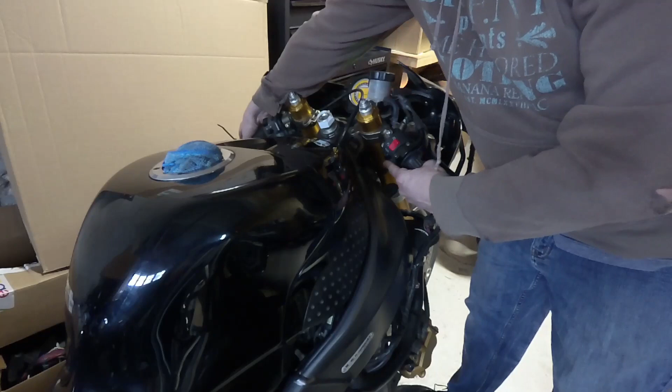We are now in 2023. I haven't made a video for a couple weeks because I was actually 3 or 4 provinces away. I was in Nova Scotia for Christmas. I haven't been home since about the 23rd of December, and I got back around the 7th of January. So kind of missed working on the bikes. I didn't really have much to do down there, just visiting family. I hope you all had a good Christmas. I hope you all had a good New Year's.

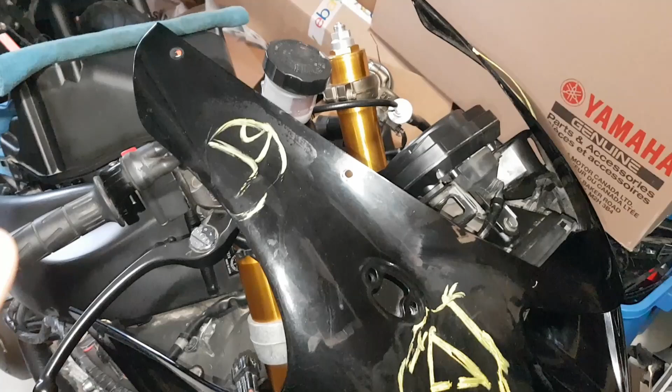We're back in 2023. We're ready to get back on the ZX-636. Alright guys, let's get right to it. We're going to try to start this bike up in this episode. In episode 2, I hit the bike with juice, and it looks like the bike is alive. So the next step now, let's get this thing started. We're going to continue working on this auction find 2006 Kawasaki Ninja ZX-636.

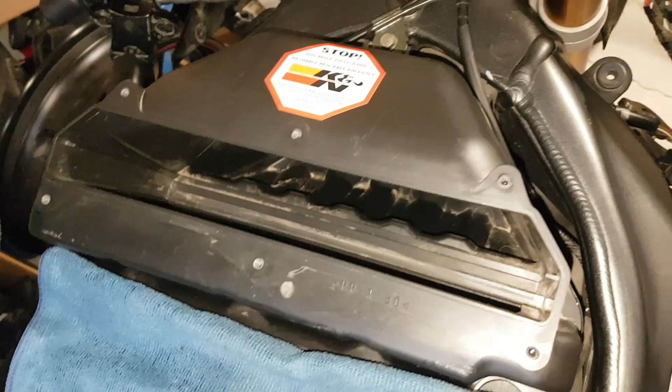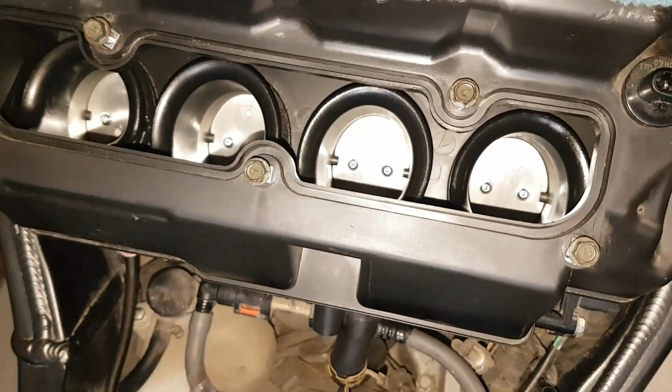I've got the airbox back in place. I've got it all bolted down. Everything looks good and tight under here. It's all secured. What I'm going to do now is I'm going to drop in the K&N air filter. I've had it soaking overnight, so I've cleaned that up a little bit. I've cleaned the airbox out as much as I can. So we're going to get that air filter in. We're going to throw our injectors back on here on the bike. And then we are going to get the tank reinstalled. And we're going to try to start this bike up, guys.

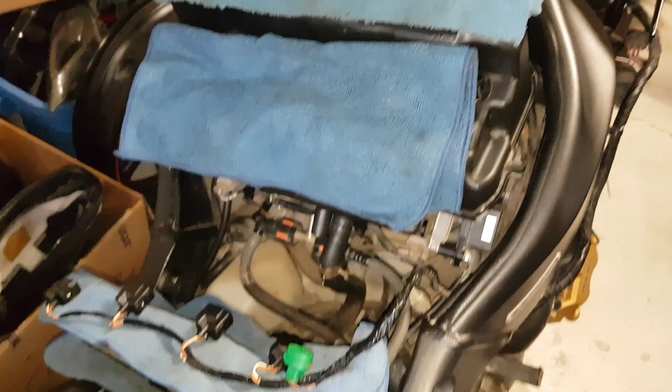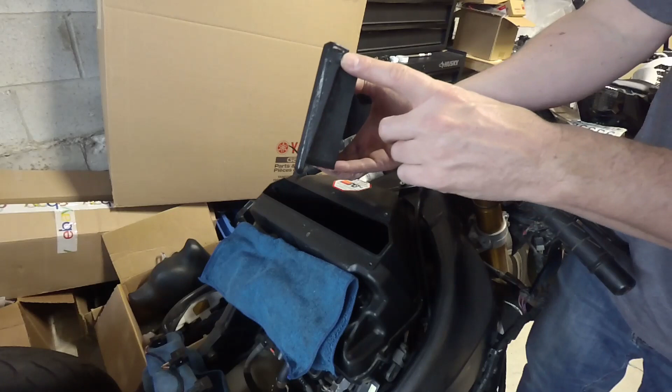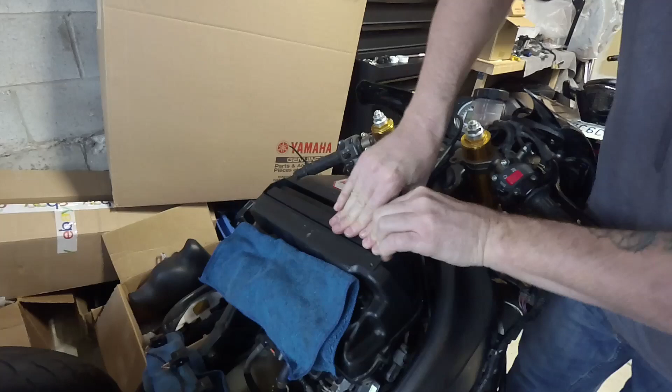So here is our K&N air filter, guys. If you want to know what the part number is, it is KA6005. It's got like an angled edge on it. This can really only go installed one way inside your airbox. You can't really go wrong. I've had this soaking overnight. I've cleaned it all up, so it's just like new again. Okay, let's push that down. Okay, so there we go. The filter's in the bike. Here is our filter cover.

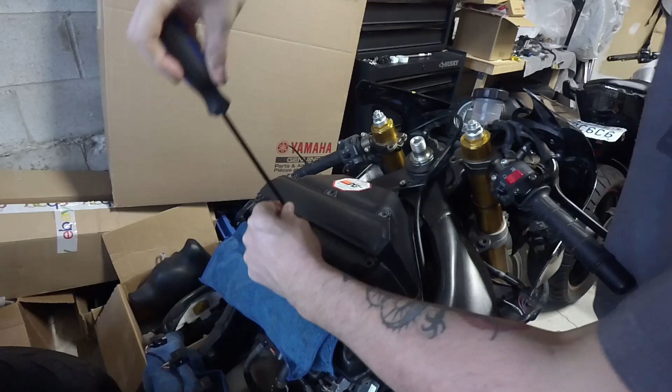Alright, we're going to start from the middle. Not that it matters, guys. This is just a cover. There's no specific torque settings or anything here.

Don't mind the noise in the background. Probably just my neighbors starting up.

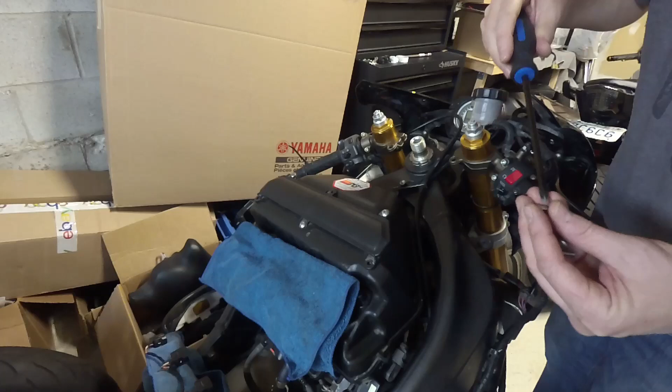Notice I don't use any powered tools, guys. I like to put everything back together by hand. You get a much better feel for the tightness of the bolt. So you don't want to over tighten anything or strip anything.

So I was kind of happy to see that we actually had a K&N air filter on this bike. It's always a plus. It means that someone did somewhat care about this motorcycle. They didn't just run it to the ground. Unfortunately, someone stole their bike, I'd say, and they were left bikeless for a little bit.

So these bolts, I'm just going to kind of hand tighten them, guys. I'm not going to crank them in too hard. So there we go. Airbox is in. You can see I've actually cleaned it up a fair bit. Air filter's in, cover's on. Next thing we're going to tackle here is our fuel injection.

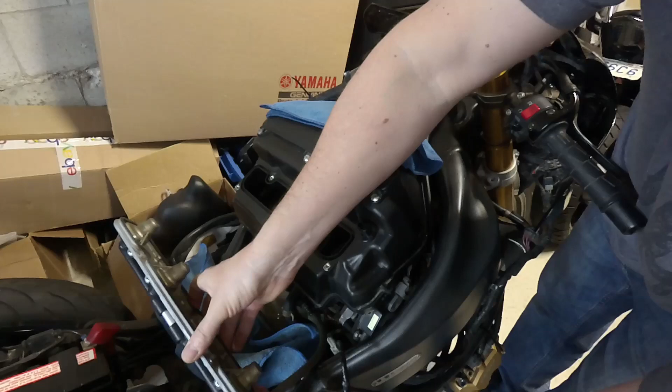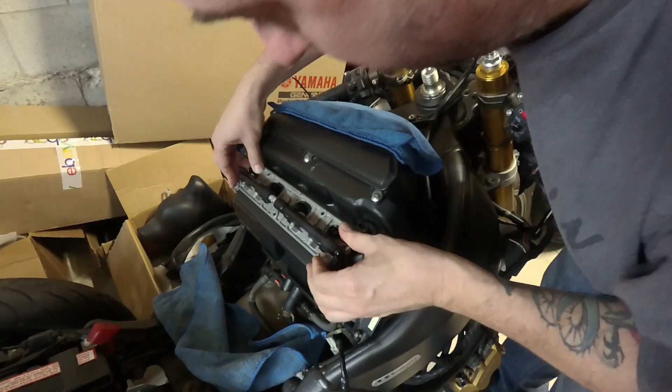So let's grab our fuel injectors here. There is a gasket around the back of this. I'm going to make sure it is actually in place. It looks pretty good. Let's see what happens. Alright, let's put this back in place gently. Let's see, is our gasket sitting good? Yes, gasket looks like it's sitting good.

Okay, for these bolts, guys, this is an 8mm bolt. There may be a torque setting here. I'm going to check the manual. I'm not sure, and there actually may be a sequence, but I suspect maybe not, but I will double check just to make sure. Actually, what I'll do is I'll grab my socket here and I'll run these down just by hand. So this is an 8mm socket. I'm just going to run them down by hand. I'm not going to crank them in tight or anything right now.

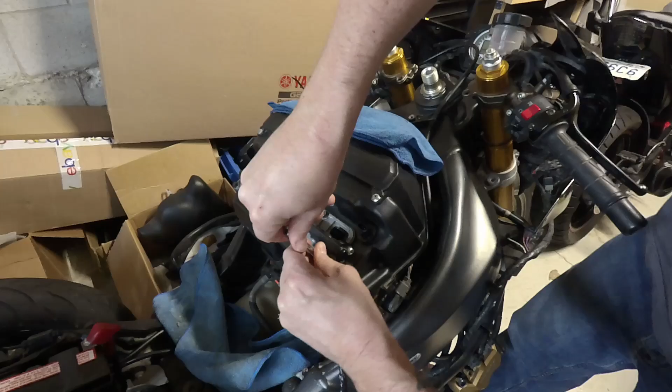Everything's going back into place pretty nicely. Hope I didn't speak too soon. Alright, so I'm just going to hand tighten these down, guys. I'm not going to torque them at the moment. I will see if there's a torque spec in that manual. I'll be right back. So I'm looking at the manual here, guys.

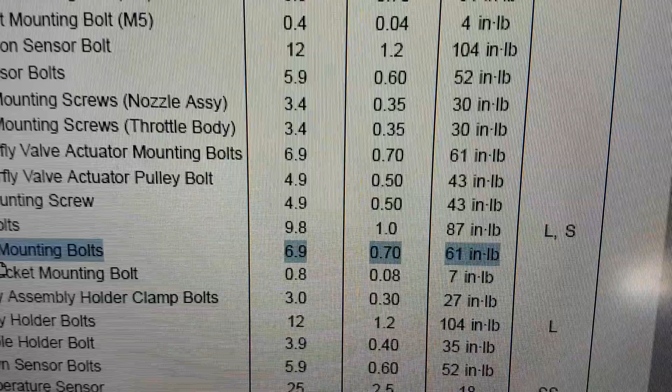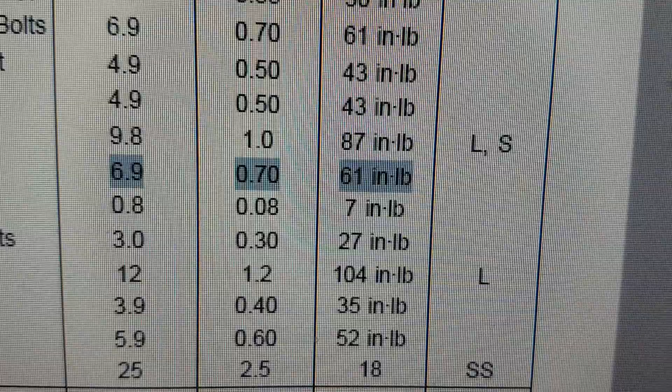I found this nozzle assembly mounting bolts. I assume that's the piece that we're talking about. So the torque is 6.9 Newton meters or 61 inch-pounds. So they are not very tight at all. Let me go tighten that up.

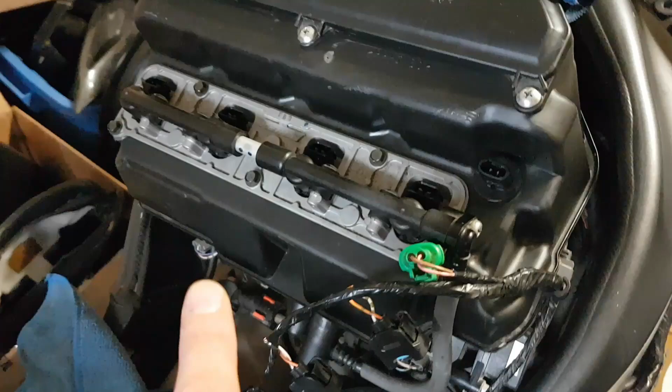So I've tightened these down to 6.9 Newton meters as specified in the manual. Now we can put our electrical connections back in place here. We'll start on the far end. Get my fat fingers out of the way.

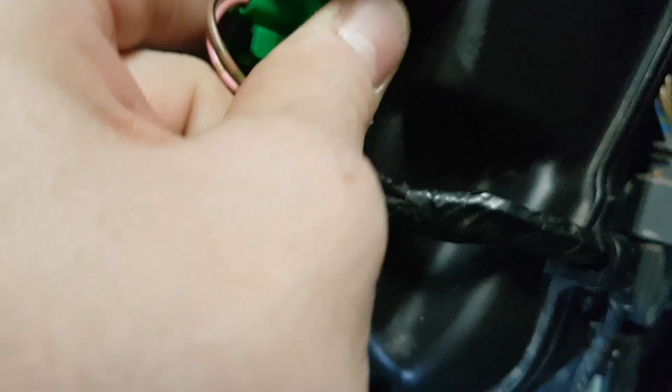And last but not least, this right here. This is probably, I'd say, some kind of air flow sensor or something. I'm not exactly sure. It is on the air box, so probably. Okay. Just checking all the connections.

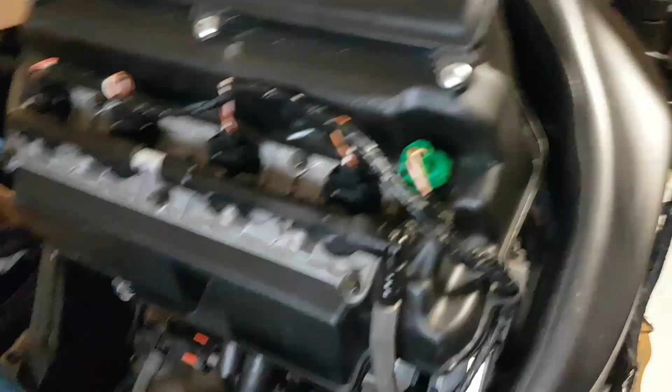So there we go, guys. We have our fuel injection reinstalled. All the cables are reinstalled, the electrical harness. And now it's just a matter of buttoning up this hose down here on the air box. Can slide that on there right now.

Alright, hose is on. Actually, I just put that clamp on with my fingers. Wasn't too bad after all. We'll get it right back in the same spot where it was seated. So our air box reinstallation is complete. And everything else here is good to go. Our fuel rail, our injection, it's all good to go.

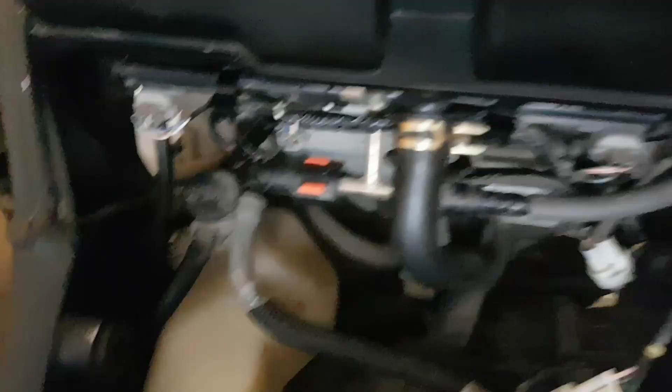Okay, guys, I'm going to clean up a little bit here inside the bike. You still see there's some dirt down in here. And I'm going to get that gas tank plugged in, and then we're going to try to give it some juice.

So I made a purchase for the bike, guys. Just before I came back for Christmas, I purchased a brand new BikeMaster Platinum battery. Part number's there, MS12-9BS. The FZ6R battery I had in there is a little bit tall. It kind of interferes with the gas tank a little bit. So I actually wanted to order the proper battery just so I don't short anything out on the terminals or anything crazy happens.

Now, do yourself a favor, guys. This is going to save you headache. The little bolt and nut on these batteries, it's very easy for this nut to fall loose and end up somewhere in your bike, and you're going to have to dismantle probably half your bike to find it. So there is a solution. Take a piece of heat shrink tubing. Actually, you're going to take two pieces. You can see what I've done over here. You're going to cut that tubing just so it slides in underneath that nut.

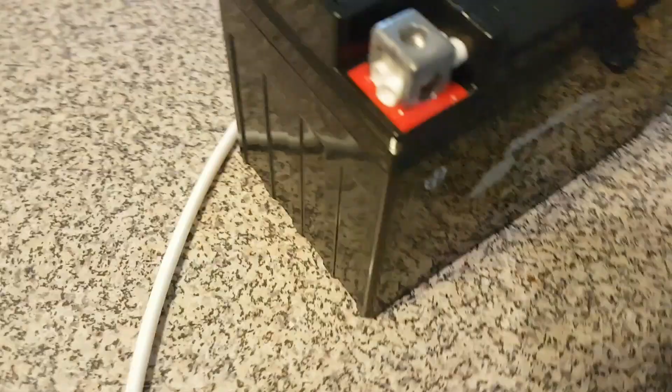When you take this bolt out, and I'm going to show you what happens, you see how that nut doesn't have anywhere to go? It doesn't have anywhere to drop. It sits there on top of the heat shrink tubing. It will save you a lot of hassle, guys. So, small little trick, but do that on both sides of your battery terminals. It'll keep that nut from sliding away, and it's going to save you a lot of headache down the road. Okay, let's go get this battery in the bike.

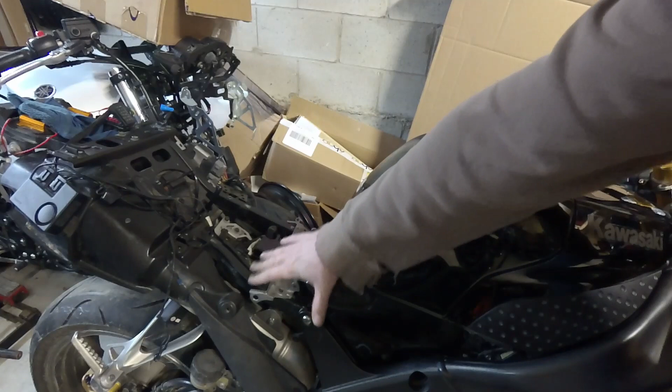Alright, so I put my battery in, the new battery. I put the tank back in. I've made all the connections. Put some fresh fuel in the bike. And yeah, let's give it a crank. Let's turn it on. I am a little concerned I don't hear the fuel pump priming.

Well, it's trying to turn over, guys. It's not turning over. To be honest, I did have this bike started before Christmas. I just came back. It seemed like there was no gas in the tank. I don't know if it evaporated, but I put a little bit more gas in it. It's not wanting to fire up. So, looks like I got to do a little bit of troubleshooting. Let's see what it is.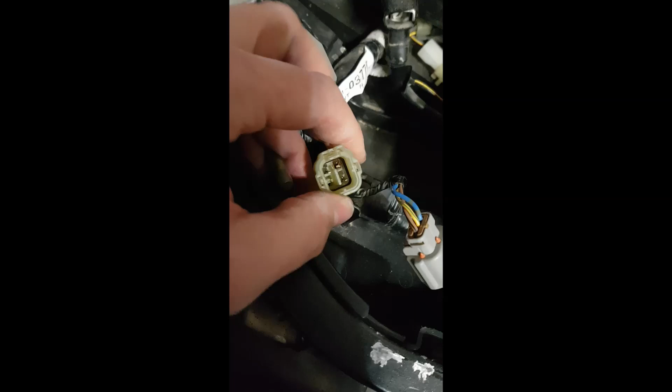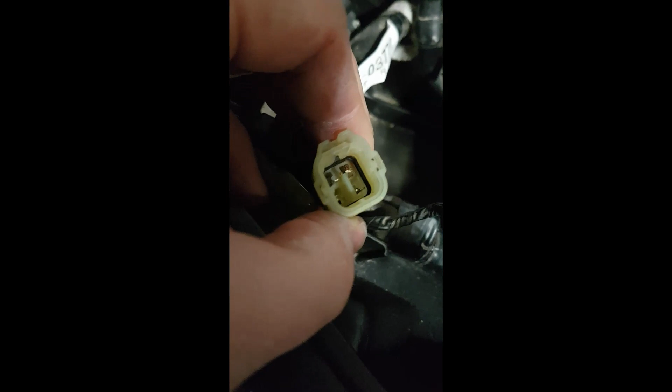I may know the problem, guys. I remember before, I was tinkering with this tank, and the mistake I made was I did not disconnect the battery, but I was plugging and unplugging this connector. And I do remember hearing a little bit of a pop, saw a little puff of smoke. I'm not sure if you could see that brown pin down in there, the top pin on the right. I believe I have damaged that pin and that wire. It's very hard to see, but the wire is actually exposed here. I believe I melted that wire.

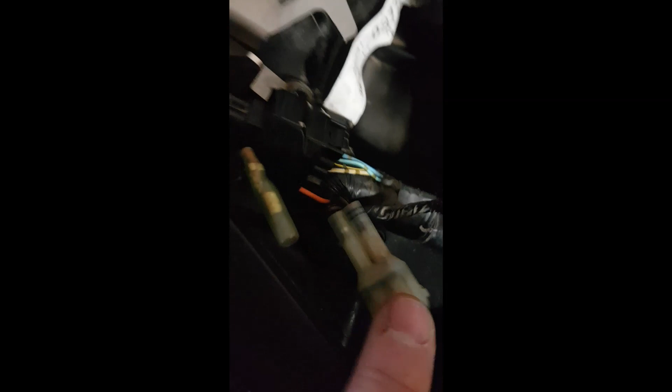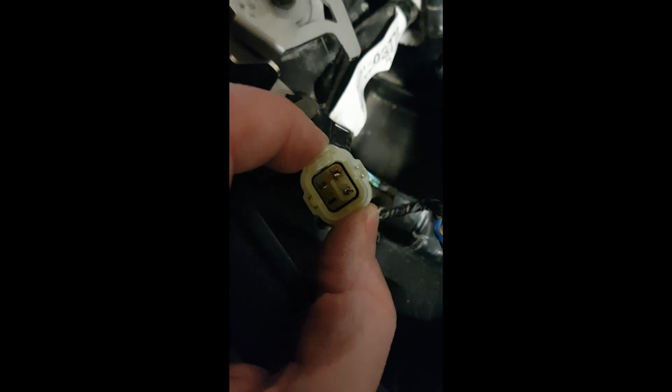So I'm going to have to cut into this harness a little bit because there is literally no slack on this connector. I'm going to open up the harness, follow that wire back, take that wire out of that connector and reconnect it a different way. I'll leave the other two wires in the connector because those pins look good, but that third wire doesn't look so good. So that is my suspicion. But anyways, let me work on that, guys. I'm going to open this little harness up, pull the wire back out, and maybe just do a little splice over to this side of the connector.

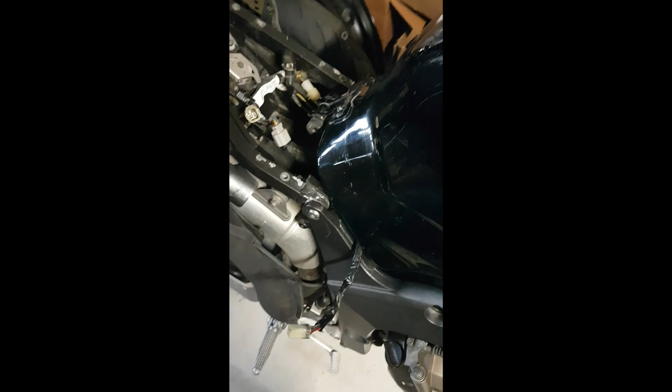And maybe that's the problem, because the fuel pump did not sound like it was priming. And this is the connector for the fuel pump, and that's where I saw a little spark. So, without dismantling a whole bunch of stuff, this is the quick stuff, the stuff that I know may possibly be the issue. Alright, I'll keep you updated on this, guys.

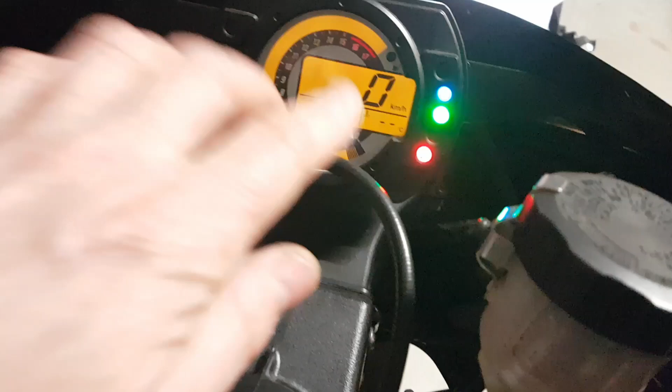Success! The bike is up and running. I guess that's an FI light, fuel injection. Not really sure what that is. But our bike is running. Listen to that.

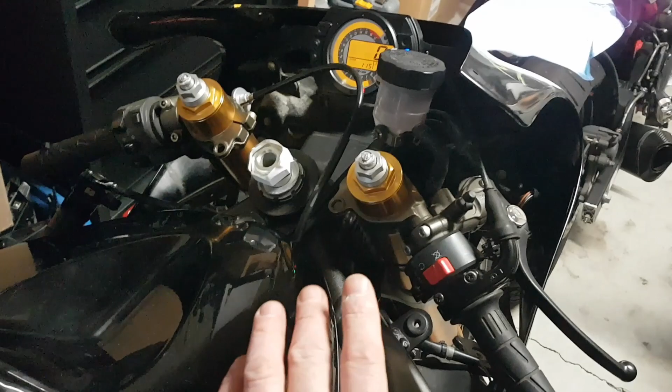Alright, let me shut it off and I'll kind of explain what I found out. Okay, so what I found out, guys, is I was actually indeed correct here on this connector for the fuel pump. I actually opened this harness up. You can see before it was all taped up and everything. I actually opened this whole harness up and I traced the ground wire back from here.

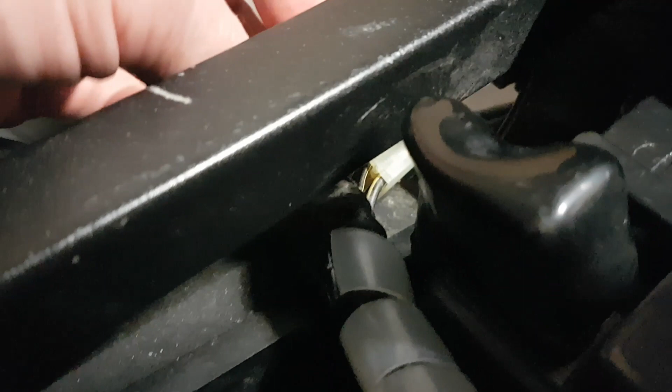The ground wire was kind of melted a little bit. It took all the sheeting off the wire. I traced it all the way back over to here. There's a couple grounds. You can probably see the yellow and black wires over there by my thumb. So that wire literally goes from there to the connector and then to the fuel pump. And I think when I heated that wire up, the pin kind of dislodged a little bit in the connector.

So I checked the wire. I put a new piece of heat shrink on that wire that burnt all the insulation off. And I've wrapped it all nice and neat back here in the bike. And I pushed that pin back in the connector, made sure everything was tight. I tested my ground from here to the bottom of the fuel pump under the tank. And turned the key on. Gave it a couple shots.

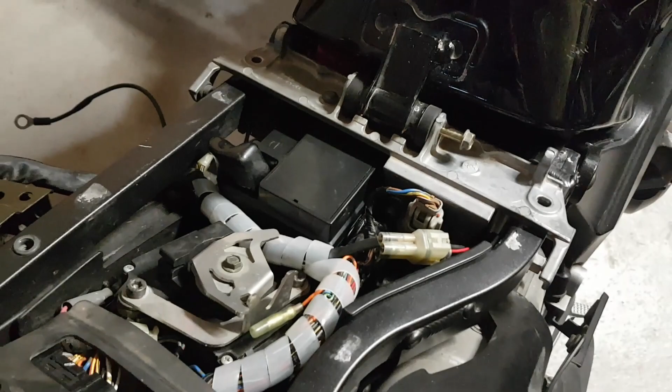Fired right up. So yeah, if you're working on your fuel system, guys, especially this connector on a ZX-636 2006, make sure to disconnect your battery first. Really, you probably just have to take your negative off. And I didn't do that when I was first playing with the bike. I hot plugged this with the battery connected, and I ended up almost destroying a wire. But it didn't damage anything else on the bike that I'm aware of.

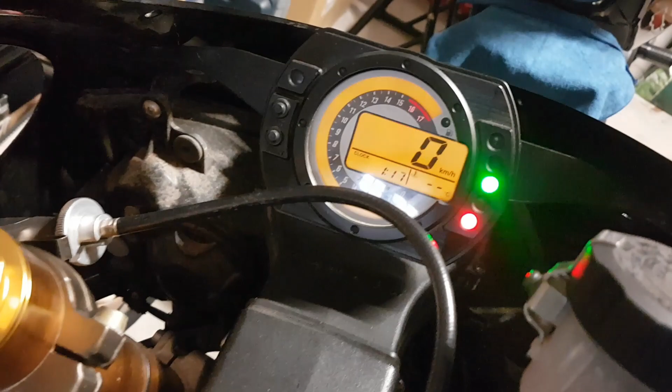The bike is up and running. And let's move on to the next thing. I don't know what it is yet, but our bike runs. Let's give it another quick fire up. The idle's a little cold, it seems. Let's see here. Look at that. Fires right up. Fires right up.

Sons of Anarchy right there. Yeah.

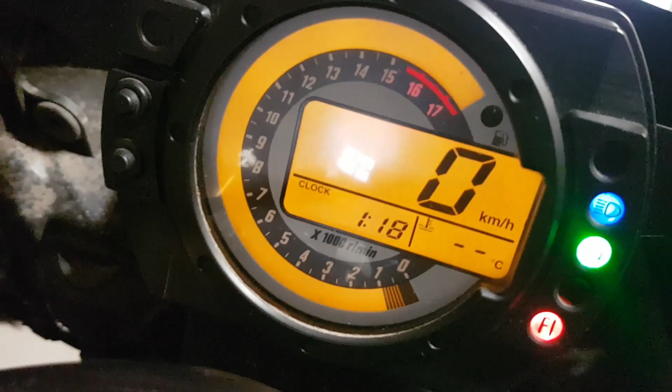Anyways, not bad, guys, for a theft recovery bike. I expected it to be worse. Other than this little mishap that I caused myself, there's no problem with the bike. Everything is running fine. Idle's a little low. And it kind of does that when you give it too much gas, it shuts off.

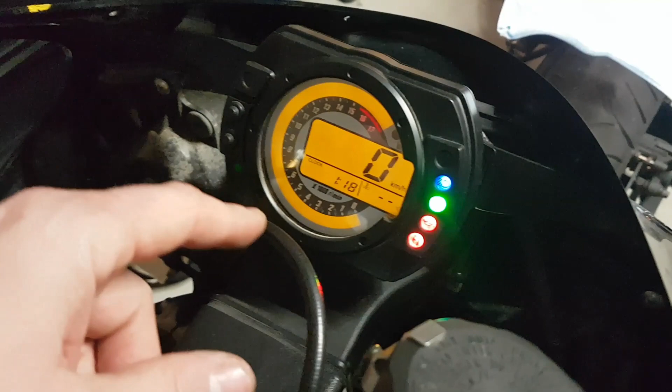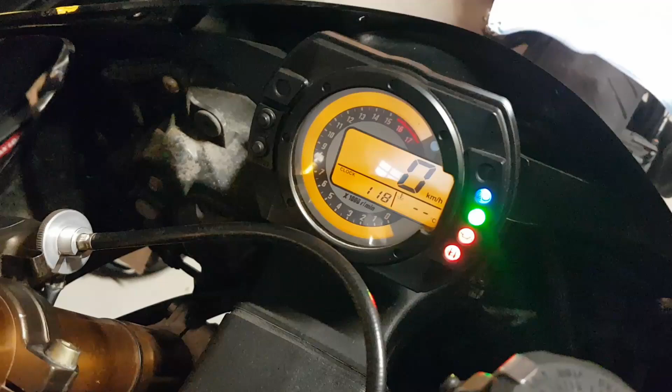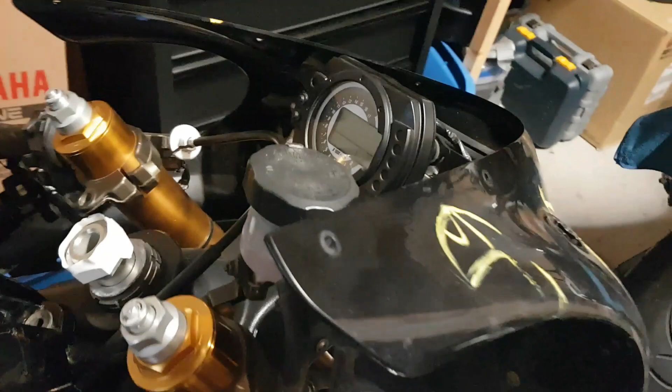Don't know why. Maybe you know. If you know why that shuts off under some throttle, drop a comment in the video. Maybe it's the plugs. I don't know. I haven't changed the plugs. I haven't looked at the plugs. I assume they're good. Could just be, hasn't been running a while. Hasn't been running probably a year. Almost a year and a half. So, yeah. Anyways, guys, let me know if you think you know what that problem might be. As soon as I apply some throttle too quickly, the bike will actually stall.

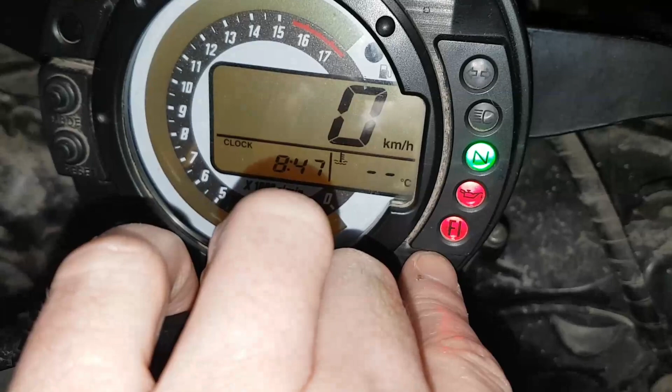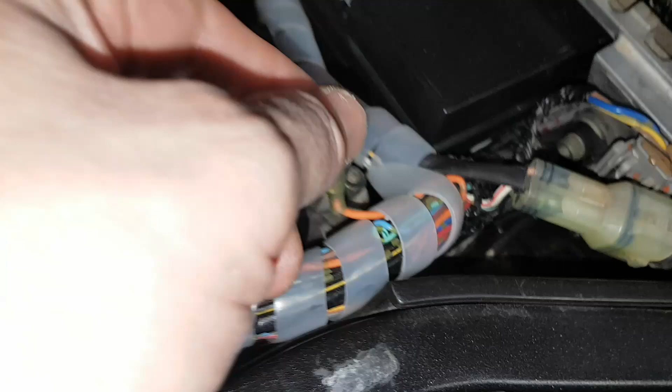All right. What's next? I was also tinkering yesterday with this fuel injection error code as well, guys. Now, this bike has a diagnostic mode. All you have to do is take this little orange wire that is under your seat and ground that to the negative of your battery. It puts that bike into a diagnostic mode, and it's going to flash an error code on your FI light. It's going to give you a series of long flashes and short flashes.

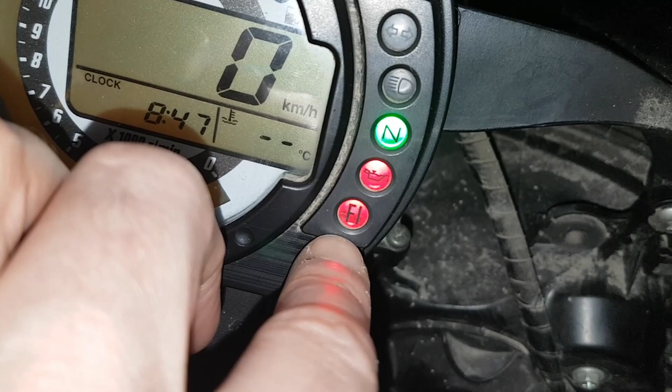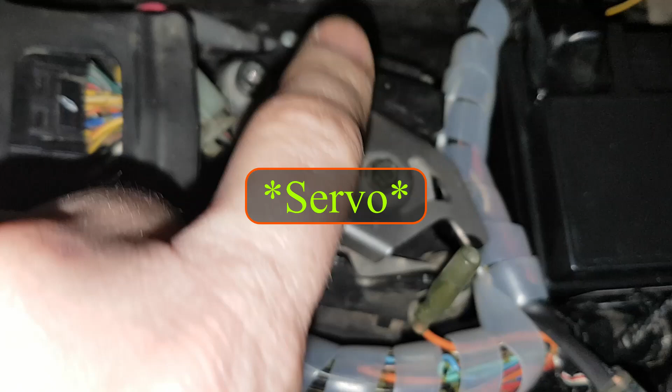When I did this yesterday, I got an error code of 6 long flashes and 3 short flashes, which is error code 63. According to the manual, error code 63 is related to this servo actuator motor for the exhaust valve. And I actually unplugged these connectors here the other day, this one and the white one underneath, and I plugged them back in, and that error code light went away. Now, today, I could see it's back on.

But anyways, that's how you get the bike into diag mode, guys. You just take this orange wire, you jumper it to the ground of your battery, straight connection, just a little piece of wire, and it will throw your error code. Alright, so I put some cellophane on my gas tank as well, just in case the gas was evaporating through the rag. I don't know, but the tank seemed pretty empty the other day.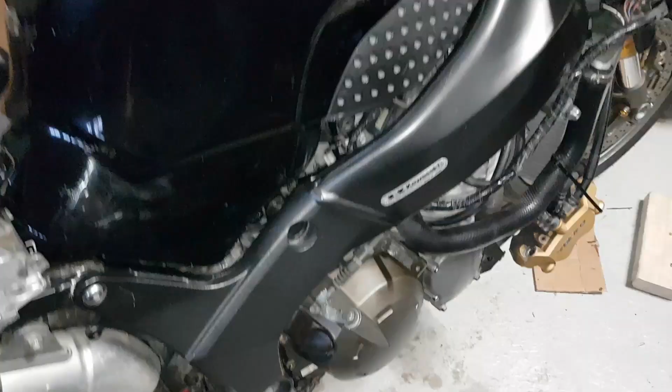Now that I know the bike runs and everything is good, well, somewhat good, I'm going to start changing the fluids. So in the next episode, you're probably going to see an oil change and probably some coolant. I noticed this bike does not have any coolant in it right now. The reservoir tank, which is under the gas tank, is empty. And also I quickly looked here in the rad, and it didn't look like there was much coolant in the bike. So that's on the agenda.